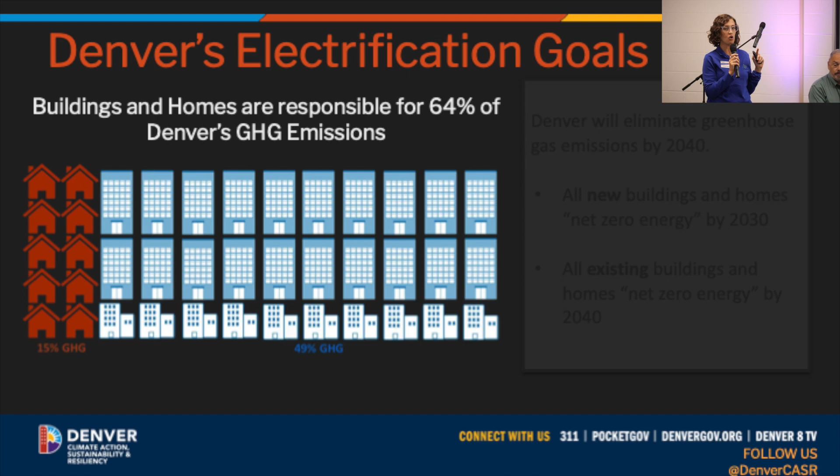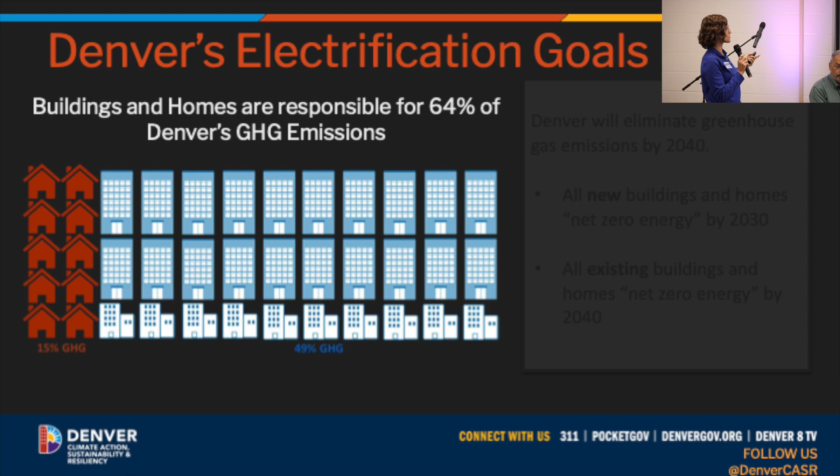Denver, with their Energize Denver ordinance, is planning to eliminate greenhouse gas emissions by 2040. So that means all new buildings and homes are going to be net zero energy by 2030. And all existing buildings and homes will be net zero energy by 2040. So you might say to me, Andrea, that's great. How does electrification, first of all, what is it? And how does it play into greenhouse gas reductions?

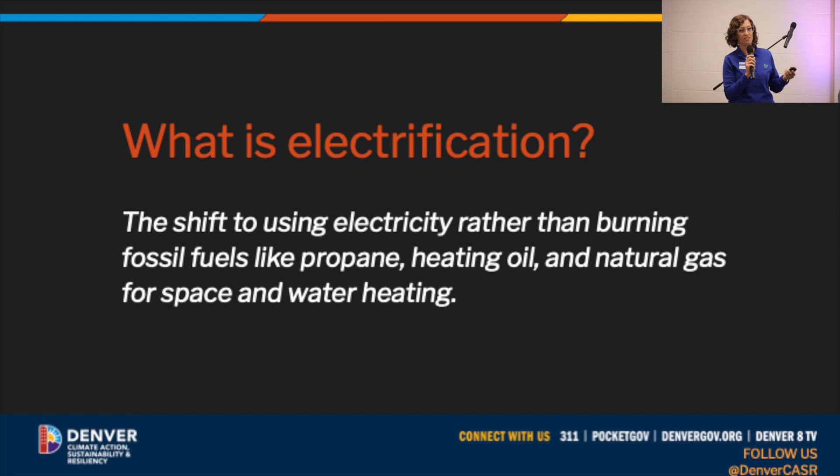So first, what is electrification? Quickly, it is using electricity to heat spaces and water instead of using fossil fuels like propane, fuel oil, and natural gas. And you might say to me, which would be a good question, Andrea, we're just switching from gas to electricity. How does that save greenhouse gas emissions? And I would say to you, this slide.

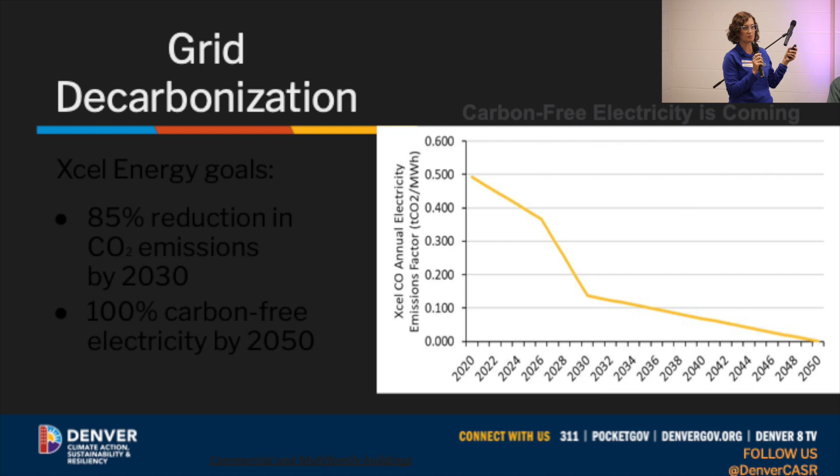And then out to 2050, they get to a totally green grid powered by renewables. So when you switch to electricity, you are essentially switching to electrons that come from solar, wind, and other renewables. All right. If you have questions on this, I have lots of resources and people and plans and documents that I can point you to. So the grid is going to be green.

Not only that, but we are encouraging people to switch not from, let's say, a natural gas furnace to electric resistance heat, but heat pumps. So you may have heard of heat pumps. Quick review on heat pumps. I'm not going to get super technical here.

Heat pump works exactly like your refrigerator. Your refrigerator moves heat from the inside where we don't want to heat up our food. It's not a microwave, right? We move it outside. If you go to the back of your refrigerator and check out what's back there, which is always a little scary to do, it turns out it's hot back there because it's rejecting the heat.

Okay, a heat pump can do the opposite. So let's pretend we wanted our food to be warm, or maybe our house to be warm, or our building. It can move the heat inside. That's what a heat pump does. Because it's moving heat, it can achieve much greater efficiencies, 200 to 300% efficiencies.

So I do want to note, while natural gas is currently cheaper than electricity, that might be a concern. Like, that's great, Andrea, but my utility bills are gonna go up. Because you're using less energy, right? And because I don't know if you've noticed, but there have been big spikes in natural gas prices and big increases, bigger than historically. Electric has gone up too. I'm not gonna deny that.

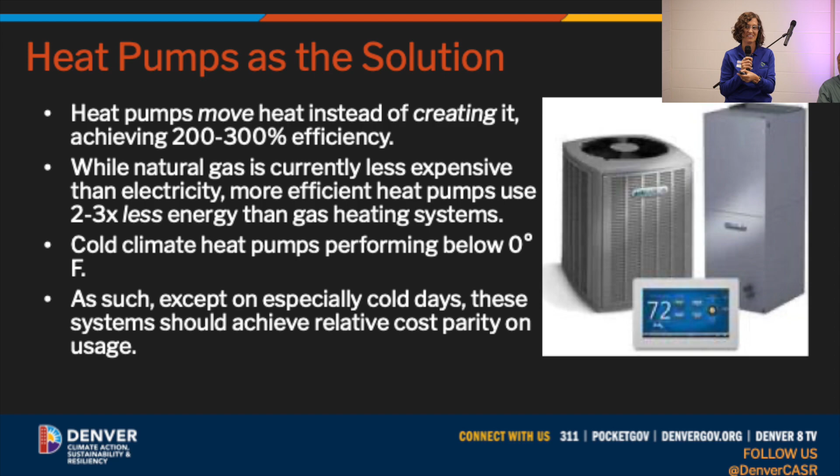Same bill. Also just wanted to address, if you have heard of heat pumps and heard they don't really work in Colorado because it's too cold. There are cold climate heat pumps these days that work below 0 degrees. New technologies, so these do work. There are also options with backup gas. So you will not be cold because you installed a heat pump. That's not the idea. Denver's not trying to freeze anyone out.

To incentivize people to move toward heat pumps, we have rebates. The city of Denver has rebates. First, I wanted to mention we have an electrification feasibility report. So you're not sure if it's right for your building to electrify and turn to heat pumps because what's it going to do to your energy bill? How much is it going to cost, et cetera.

This report goes through and compares a gas system to a heat pump system, looks at the upfront costs, the ongoing energy costs, and the social cost of carbon, and helps you determine if it makes sense and it's cost effective to do heat pumps in your building. And the cool thing is you can get these done for free if your contractor that you choose to do this applies for a rebate. You apply for a rebate, or your contractor helps you. Pre-approval is required, so don't get started without us saying go ahead, and go to newdaynewcode.com to find that information out.

As far as the actual equipment, so you've decided now, you've done a study, which it's not required to do the study. If you already know you want to do a heat pump, great, do it. But the heat pump rebates cover part of the cost of the equipment. It's intended to cover the difference between what that gas system would have cost you and the higher cost for the heat pump. So you can get up to $120,000 a year per building to install heat pumps. Again, pre-approval is required, so please don't buy your equipment until we talk.

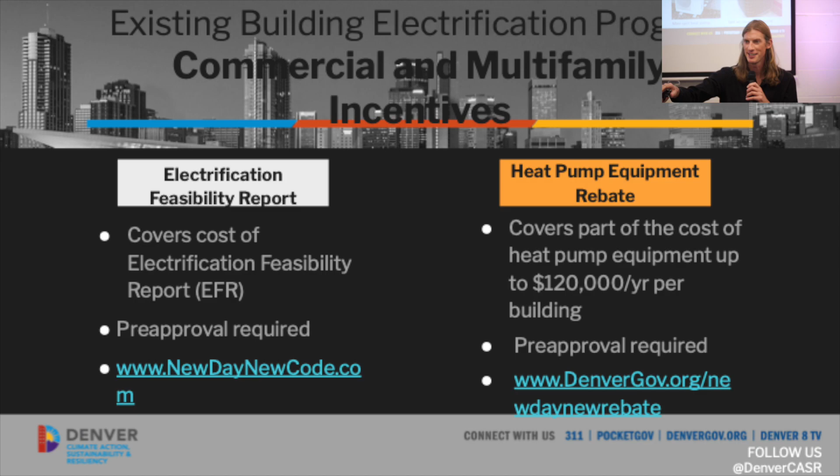Thank you, Andrea. Hello, everyone. Miles Hayes. I'm an engineer with Michaels Energy, so I'm kind of behind the scenes doing a lot of the calculation work, a lot of the boring stuff, number crunching. I'm just going to talk about some of the most common technologies that we are electrifying. Most of these should be familiar. I won't get super technical and boring.

I'll start off by saying that these rebates are super exciting. I've supported a number of utility programs over the past years, and Denver's rebates are on another level. So these are pretty exciting rebates, and we hope that they will kind of help to motivate the industry to adopt heat pump technologies. With that, so the first technology, you might be familiar. You see those big clunky things on top of your roof, the rooftop unit.

Right now, typical rooftop units, they range from like 2 to 10 tons, meaning 2 to 10 tons of cooling capacity. And usually they're packaged units, meaning that they have natural gas as their heating source. And the market has rapidly adopted new heat pump rooftop unit technologies that incorporate exactly what Andrea is talking about into a rooftop unit. So our rebates for small and sort of medium-sized rooftop units are between $5,000 and $8,000, depending on the efficiency and the control mechanisms.

There's some other specifics in there that you can see on our website, and then the larger units we have between $8,000 and $11,000 rebates for. So super exciting rebates. And then for some of the smaller systems, so you might be familiar with your condensing unit in your home. You have like a central air conditioner. It's a lot like that, but it's actually offering heating too.

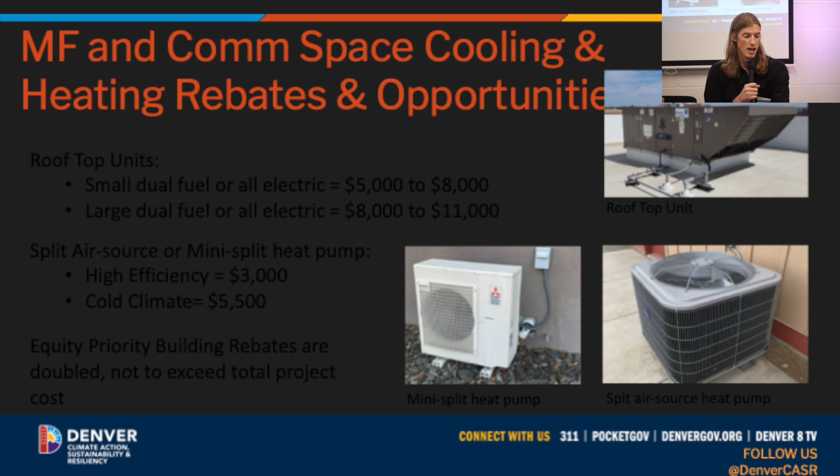Also, yes. Oh, thank you.

There we go. Okay. We also have rebates for your water heater. So you guys are all familiar with the gas water heaters. Heat pump water heaters are the same technology. They pull heat out of the air, and they run it through a refrigeration cycle, and they heat the water in your tank rather than burning natural gas. And we have a different set of rebates for them depending on how efficient the water heater is.

Again, I won't get into technicalities, but we have a Tier 3 Plus EcoPort, which basically means that the water heater is set up with the control mechanism that can communicate with the grid. So if you might be familiar with demand response, I won't get into it, but if you have peak periods, your water heater can actually operate and optimize for peak periods. So it can communicate with the grid, more or less. And rebates from the different tiers range between $2,500 and $3,500. And again, those double for equity priority buildings.

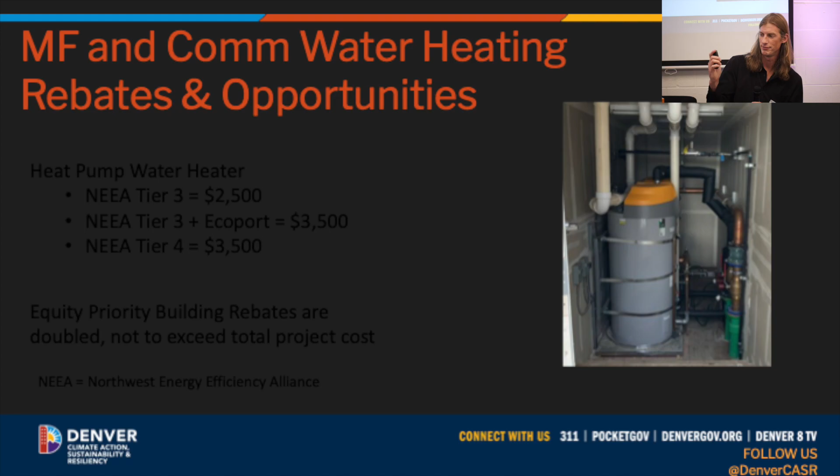Anything else you want me to add there? Cool. Okay. I'll give it back. Oh, clicker. Too many clicks. There you go. Thank you. No worries. Oh, you got to give me the clicker.

Okay. And I just want to mention the mini splits that Miles mentioned. I don't know if you guys have seen those. They're really common in Mexico and Europe. They're the ones where there's the wall unit and you have the remote control. So that's what those ones are, just in case anyone was confused.

So first you submit an application, simple. And there's going to be maybe some additional required documentation. If we have everything we need, we can turn that around and give you a pre-approval letter, which will tell you what your rebate amount would be, in 2 business days. We're at the beginning of this program, but what we've seen, we want to be honest and set expectations. It can take up to 1.5 months if we have to go back and forth and determine if your building is an equity priority building, or you have to get this documentation and figure out where to find it.

I want to give you two case studies, and then Jim will give you his very exciting net zero. These are just case studies of people going through the program. Jim will really energize you with his net zero building. I don't know if anyone's heard of Earthlinks. They could possibly be here today. Yeah, they should be. If they're not, well, I don't know what they're doing.

So they work with unhoused people to give them skills to make lotions, candles, soaps, chopsticks. You can buy stuff from them. Buy it for whatever holiday you may be celebrating in the near future and give it to people. Candles, honey. They have vegetables that they grow and then sell. They have a coffee shop, so if you just want to go and check it out, go to their coffee shop. Really cool organization. They also help to put people in stable housing, and they have a 75% success rate. So awesome organization. Happy to help them out.

So what did we do for them? They had an old rooftop unit that, because of weird configurations of old buildings and mishmash systems, which happens, was only providing heating. They got a free electrification feasibility report to determine what it would cost. Does it make sense? So then they decided to install a heat pump rooftop unit with gas backup heat. That was determined to be the most economical for them. And also that was going to make sure that they could stay comfortable given their situation.

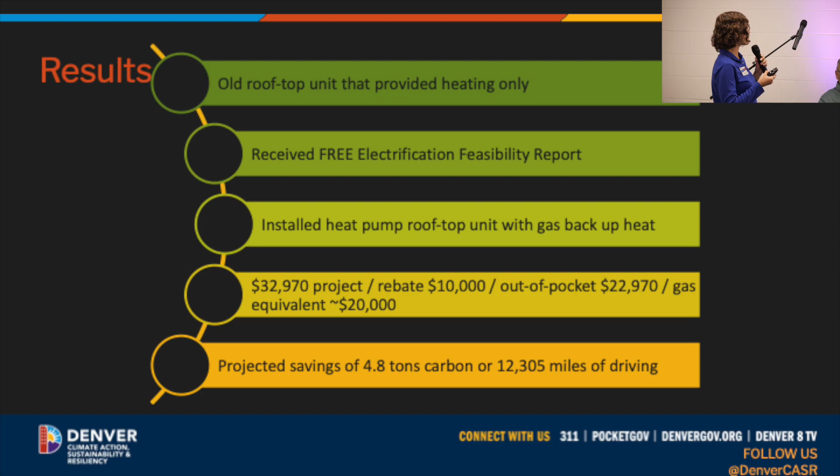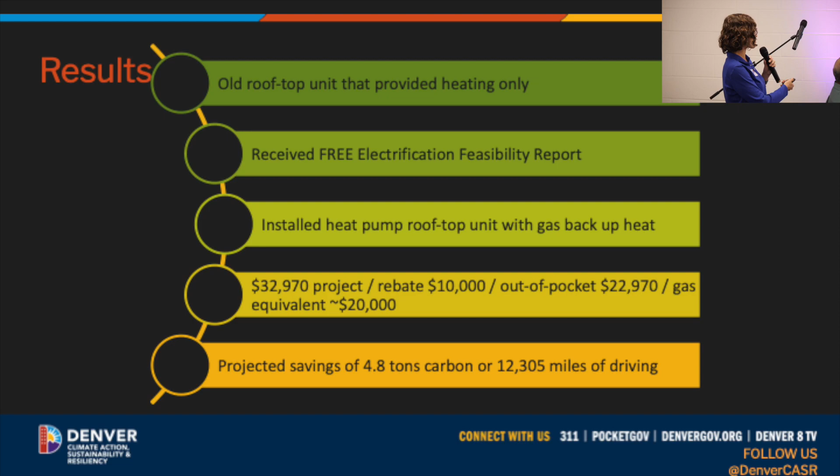And since you guys care about this, projected savings of 4.8 tons of carbon, or 12,300 miles of driving. Let's see if I memorized it and don't need to look at my notes. Okay, so that is the equivalent of driving from New York to Los Angeles, correct me if I'm wrong, 4 times, 7 days. Yeah, so I'm sorry, there was a lot of numbers. 4 times, 7 days in the car with your family. Straight. Yeah. So that's a lot of carbon, right?

Unless you're driving an electric car. Unless you don't drive an electric car, if you want to know that. But I mean, do drive an electric car, but that would not be this.

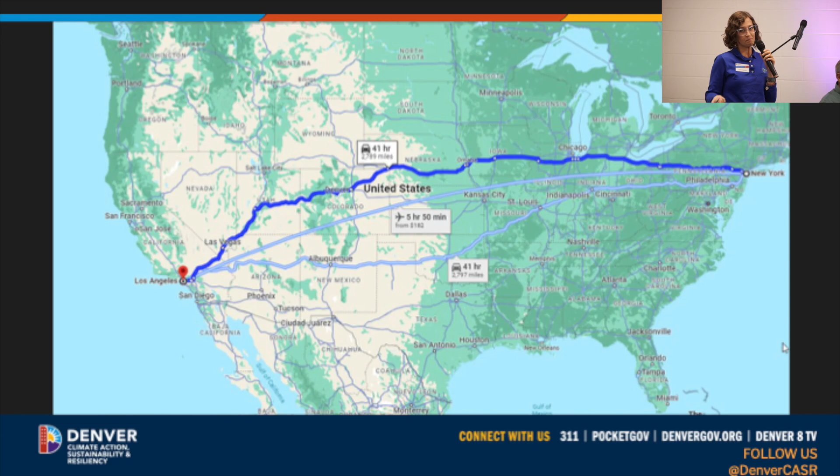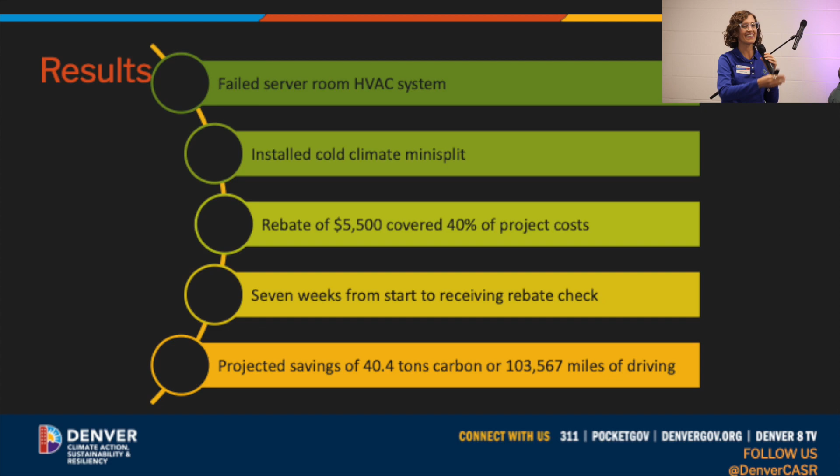So what happened? Failed server room HVAC. What they installed was a cold climate mini split. That little white thing up there, you remote control that, turn on heating and cooling. They got a rebate of $5,500, which covered 40% of their project costs, which made them really happy because they were not planning on any of those costs. And instead of a year, granted this is a little bit less complex project, it took 7 weeks from application to check. So it depends on the complexity, but we've learned a lot is the point I want to make.

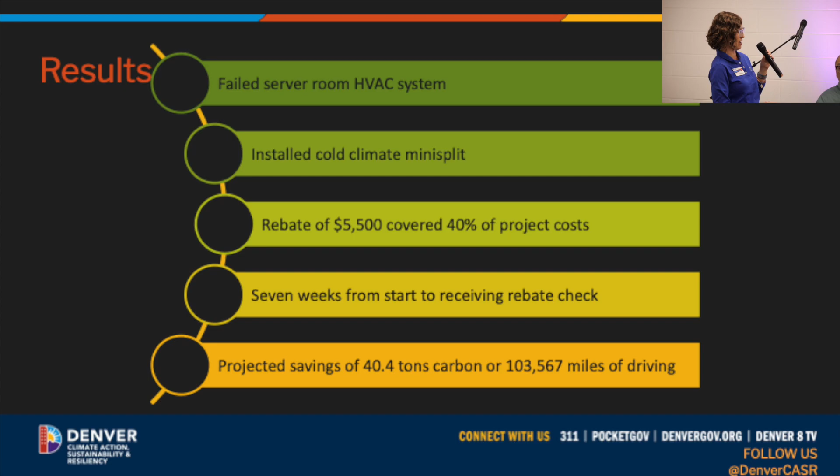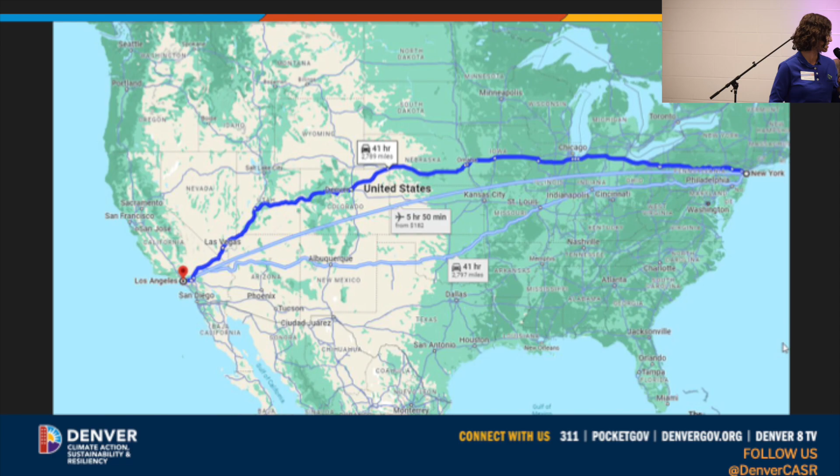And projected savings, this is much more, 40.4 tons of carbon or 103,500 miles. I got to look at my notes on this one. So 37 times back and forth between New York and Los Angeles, and that means you're basically in the car with your family for 2 months, for 63 days, right? So that's a lot of carbon offset.

That's the savings per year? No, that's the savings, really good question, over the lifetime of the equipment. How long we expect the equipment to be able to run. What's that, 20 years? Yeah, around 15, 20 years.

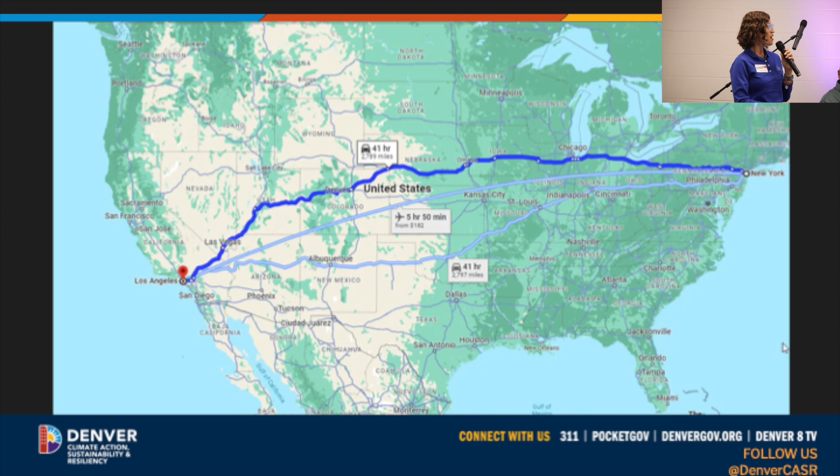Sorry? Oh, okay. Point the clicker that way. It's a little confusing. Oh, well, it worked.

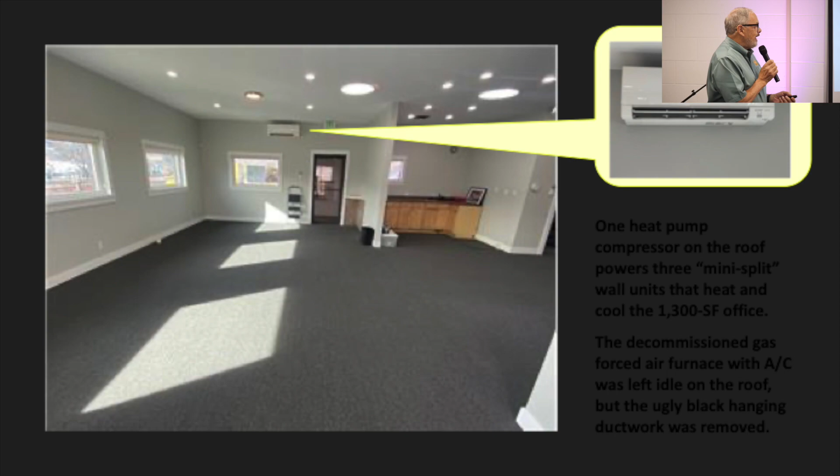And that saved us $600 a year, because that's the cost in a commercial installation with Xcel Energy. The base cost of having connection to the gas grid is $50 a month, $600 a year before you burn any gas. So having the gas meter sitting there and not using it anymore was a waste. So I got Xcel Energy to remove it, and that $600 goes a long way toward electricity. So it's not just a comparison of the cost of natural gas and the cost of electricity, which is much lower with heat pumps, that you save a tremendous amount.

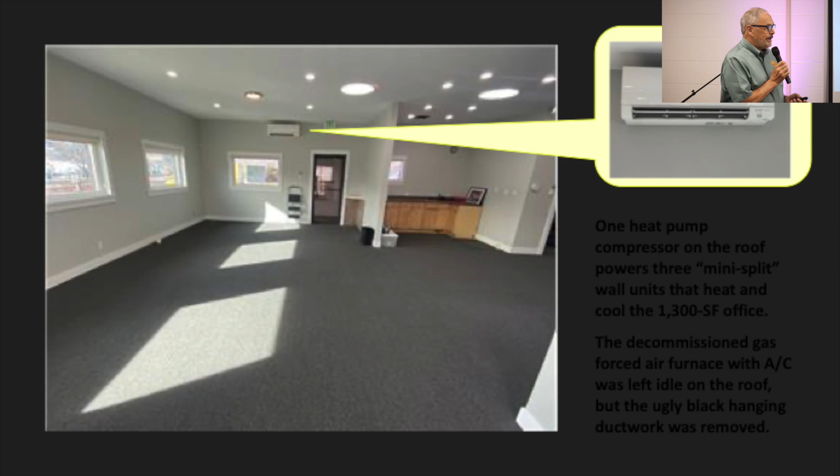So we automatically went to net zero energy or beyond, by actually generating more electricity than we needed for the heating, cooling, powering, and charging of our electric cars. We even have two free charging stations for the general public to charge their electric cars. So it was just a no-brainer. I didn't look at return on investment because I don't care about return on investment. It cost us about $15,000, I think, to put in the heat pump system. We had no rebates. I'm so impressed at the rebates that Denver is doing.

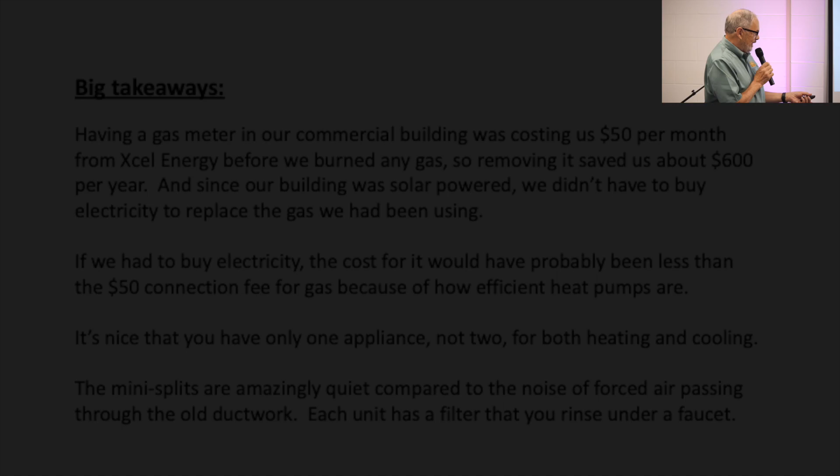This is amazing. I don't know of any. Is there any other city in the country that's doing anything comparable? Yeah. Boulder is doing some stuff. Boulder. Well, you'd expect that from Boulder. Yeah. They say Golden is becoming like Boulder, but you're competing with Golden now. Yeah, bring it on. We just need all the cities in the country to compete with Boulder.

So, and really the cooling is such a nice benefit from it. By the way, if you think that heat pumps are new, if you go to Europe, in almost every city that's not a World Heritage Site where they ban it, there are all these compressors for heat pumps mounted on the faces of the buildings. You see them all over the place. On every apartment, you'd see a heat pump, and that's the air conditioning unit for that building.

I asked, well, how do they heat? Do they use those for heating? And they said no. Most of those apartments have gas forced air or other fossil fuel heating, but I said, well, couldn't the heat pump do that? Well, the cold climate heat pump is fairly new. It's only been in the last 10 years, or 5 years really, that you could get a heat pump which could extract heat from the outdoor air even when it's 0 degrees Fahrenheit.

When I installed in my own home a heat pump hybrid system with the gas backup in 2012, the heat pump component could only extract heat from the outside air if it was like 30 degrees or above. And so it had a gas backup. And gas backup was mentioned in an earlier presentation. But nowadays, that gas backup isn't needed. It'd be much smarter to just have resistance-based portable space heaters if it gets to like 10 below zero.

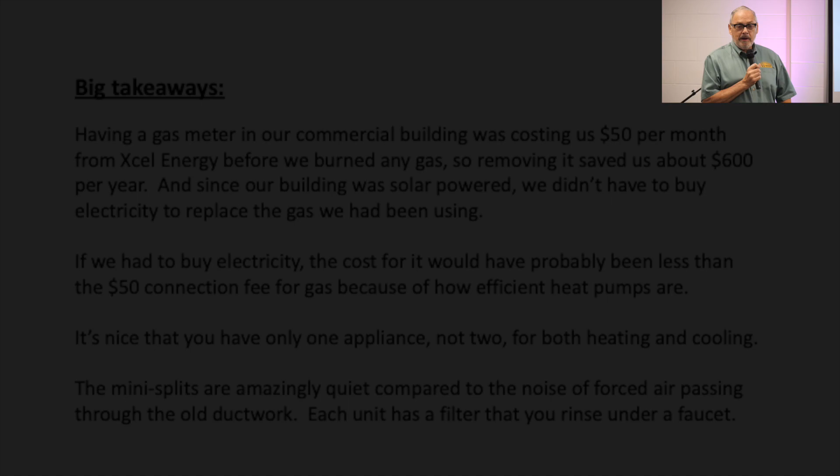But at any rate, we were just super comfortable and very warm in the winter and very cool in the summer. Just a great system. And so we're very happy with it. Okay. Then we sold the building 2 months ago. And 2 years ago, we moved into this office in downtown Golden, and it had a gas forced air furnace with an AC unit, and we're on the first floor of a 3-story building, so we couldn't have it on our roof, but we could put it on the roof above, and the pipes ran down. And for heating this office, we put in what's called a cassette, that drops into the drop ceiling, and that one unit heats our office just like the 3 mini splits did in the other office.

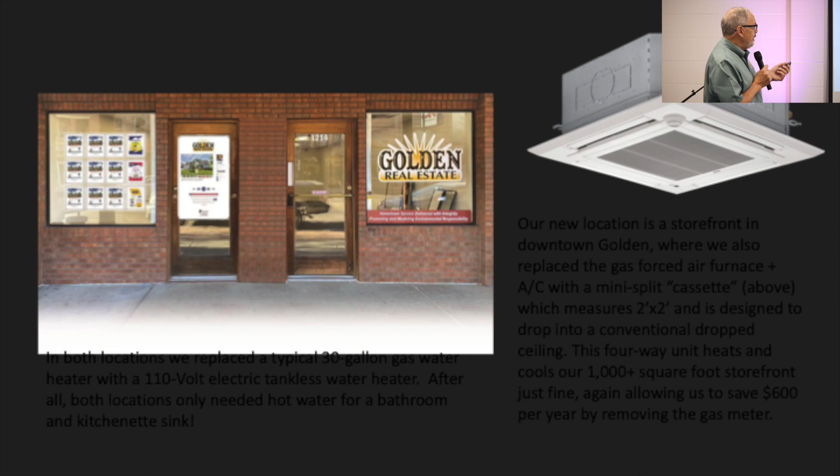And we got rid of the gas meter, saved another $600 a year. We don't have any solar power to offset it here, because again, we didn't have our own roof we could put them on. But our total electric bill for heating, cooling, and powering the office is rarely above $100 a month. So that's pretty cool, pretty warm. And getting rid of the gas water heaters was a no-brainer too, because in an office you don't need a 30-gallon tank or a really high-capacity tankless water heater. We just had a little 110-volt point-of-use water heater for the restrooms in both offices.

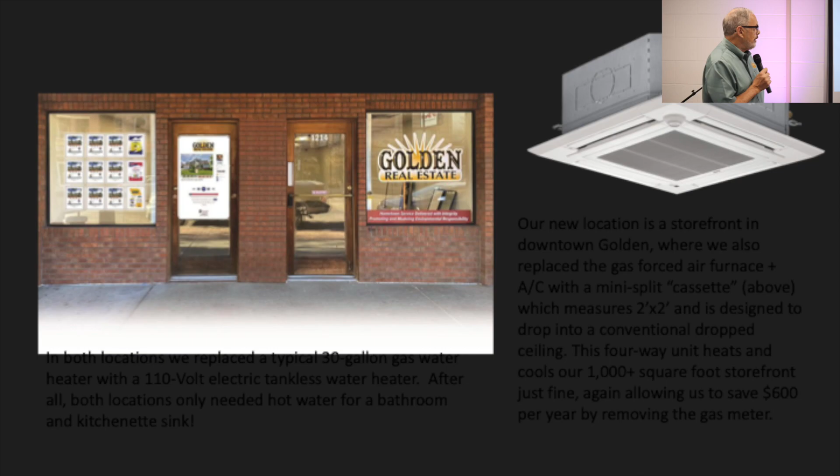No, that was just a resistance-based point-of-use tankless water heater. You could buy it for $100 to $200 at Home Depot. So if you have any questions, there's my contact info. I do have handouts here with all these slides on it. The vendor we used for both of our installations was GB3 Energy, and I also recommend Sensible Heating and Cooling.

And one of the problems is that you'll find that most of the HVAC vendors don't really know about heat pumps. And so if your furnace fails, they're going to want to install a new high efficiency gas furnace. This is the thing you should do. A heat pump, no, they're no good below 30 degrees, because they don't know about the new technology. But Sensible Heating and Cooling will sell you a gas forced air furnace if you insist, but they will try to educate you and sell you on a heat pump system, and I love that about them. Very rare among HVAC companies.

So that's all I have. Thank you. How did I do on time? Just a quick mention. It's both.

I just wanted to mention we are working very much with the trades to make sure that we have a list of contractors who know how to install heat pumps. So if you are running into issues, one of our partners, Lashida with Zozo Group, had the exact same thing. A furnace went out. Someone came out and said, you have to install a new furnace. She said, no, what about a heat pump? They said, no, you don't want that. We are collecting a list, and we can refer you to contractors who know how to install heat pumps. But thank you very much, Jim, for the recommendation.